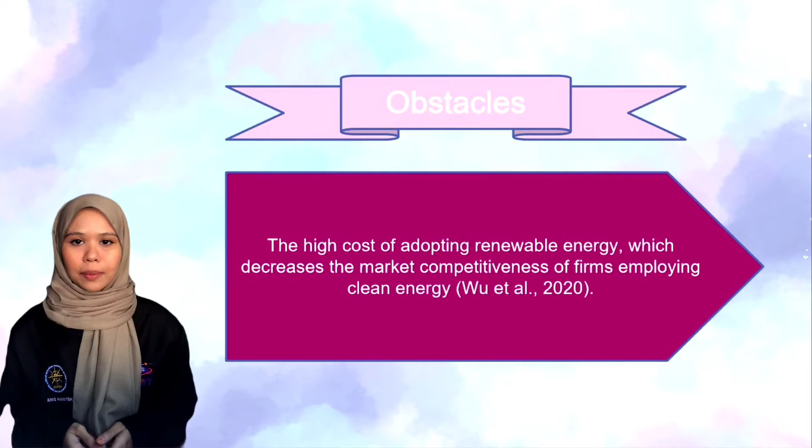Research by Ye 2017. However, there is an obstacle to reducing carbon emission, which is the high cost of adopting renewable energy, which decreases the market competitiveness of firms employing clean energy, from research by Wu 2020. Besides that, the greenhouse effect is a major component in keeping the Earth warm because it prevents part of the planet's heat from escaping into space if it were to escape through the atmosphere.

Without the greenhouse effect, the average global temperature on Earth would be substantially cooler and life as it is would be impossible. Water vapor, CO2, methane, nitrous oxide, and other gases are examples of greenhouse gases. CO2 and other greenhouse gases act like a blanket, trapping infrared radiation and preventing it from escaping into space. Thus, the obvious impact of greenhouse gas is the steady heating of the Earth's atmosphere and surface, resulting in global warming. Research by Kweku 2018.

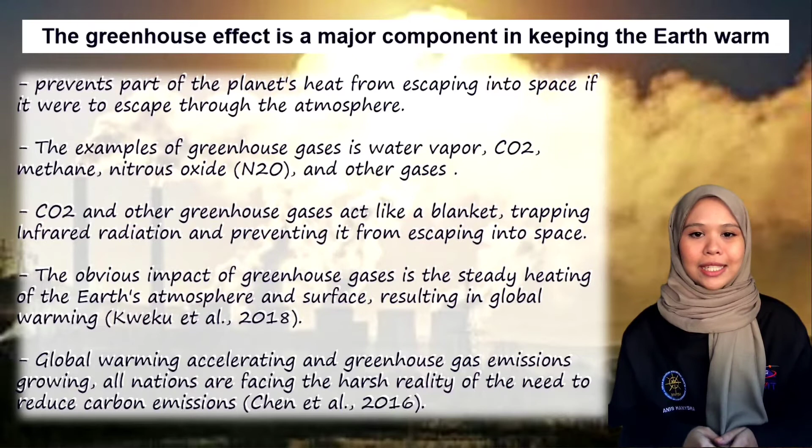Therefore, research by Chen 2016 mentioned that with global warming accelerating and greenhouse gas emissions growing, all nations are facing the harsh reality of the need to reduce carbon emissions.

Last but not least, research by Walker 2018 mentioned that maritime transport harms the marine environment, including air pollution, greenhouse gas emission, release of ballast water containing aquatic invasive species, historical use of antifoulants, oil and chemical spills, dry bulk cargo release, garbage, underwater noise pollution, ship strikes on marine megafauna, risk of ship grounding or sinking, as well as massive ship pollution of ports during transshipment or shipbreaking activities on the maritime environment.

Next, I would like to explain the results and discussion. In this chapter, the description is based on the objectives of the study. The first objective is to investigate the issues and challenges of reducing the impact of carbon on the marine environment. First of all, we all know maritime transport has an important role in international trade. According to the United Nations 2016, maritime transport has become the backbone of international trade and the global economy.

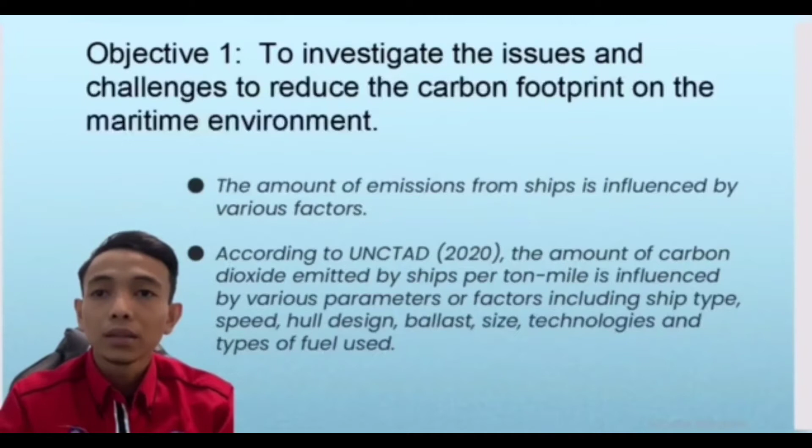However, in this development, there are also issues arising from maritime transport operations. Among them is the issue of carbon emissions released by maritime transport harming the marine environment. The amount of emission from ships is influenced by various factors. According to UNCTAD 2020, the amount of carbon dioxide emitted by ships per ton mile is influenced by various parameters or factors, including ship type, speed, hull design, ballast, size, technologies, and type of fuel used.

This figure shows annual carbon dioxide emission per vessel by vessel type in 2019. According to UNCTAD 2020, ships of larger size will naturally release more carbon dioxide per mile. However, in terms of per ton mile, larger ships will emit less carbon dioxide. This is because smaller vessels such as container ships of up to 999 TEUs emit twice as much carbon dioxide per container carried.

Container ships tend to use higher speeds in transit than dry bulk carriers. This is the reason why carbon emissions from container ships are higher than bulk carriers in terms of per vessel per year, as shown in this figure. Therefore, this leads to increased emission of carbon dioxide gas.

From that figure released by UNCTAD 2020 also, bulk carriers and container ships are the highest carbon dioxide emitting ships in 2019, at nearly 250 million tons per year. In addition, liquefied natural gas carriers and cruise ships emit higher amounts of carbon dioxide per vessel because their average size is much larger than offshore and service vessels.

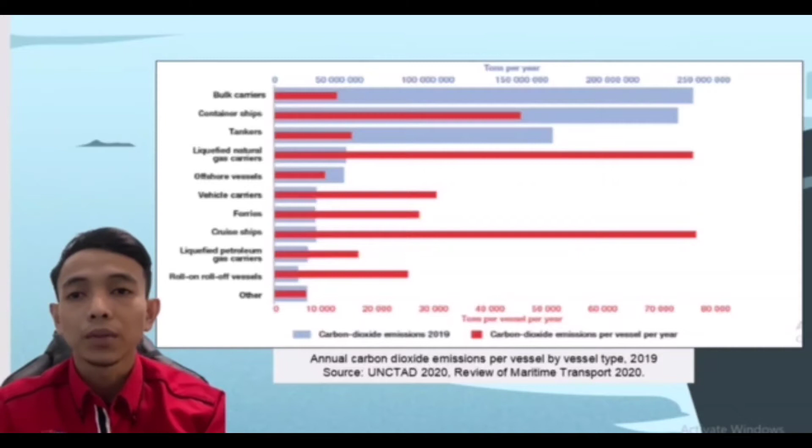For voyage-based international shipping, CO2 emissions have also increased from 701 million tonnes in 2012 to 740 million tonnes in 2018, an increase of 5.6%. Therefore, this suggests that there is an increase in the amount of greenhouse emissions into the air caused by maritime transport operations.

Next, for objective 2, there is a risk challenge from carbon emission to the marine environment, such as the climate change challenge that will affect the environment. This is evidenced by studies from Kosowska-Stamirowska 2020 mentioning that the future of the maritime transport industry is highly linked to climate change. The movement of ships contributes significantly to CO2 emissions, and future shipping routes are expected to be affected by climate change.

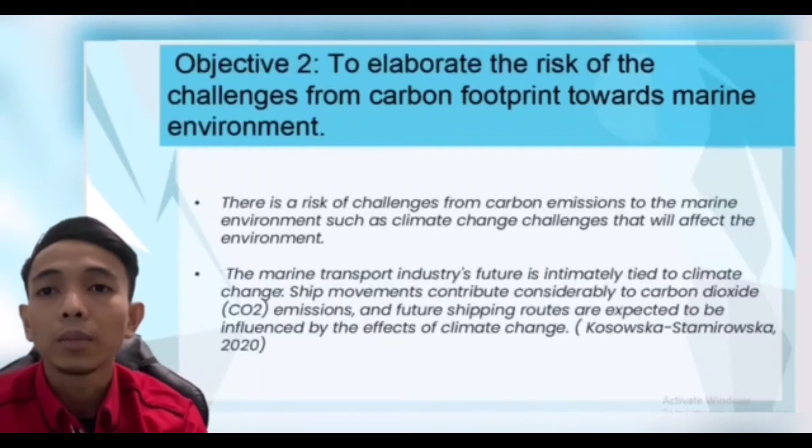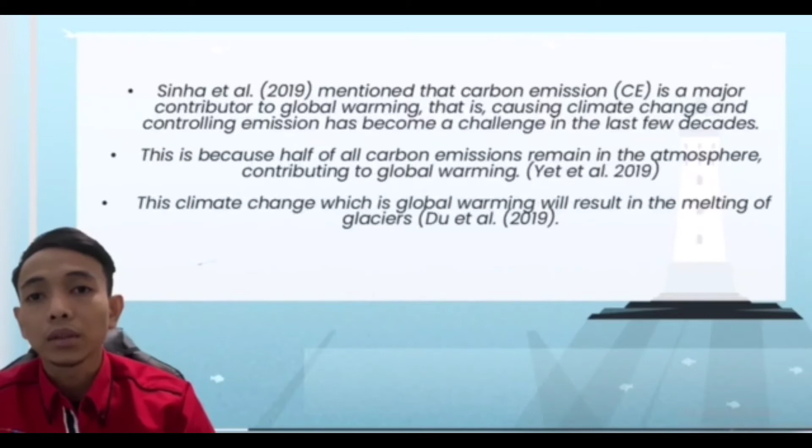Besides, Sinha et al. 2019 mentioned that carbon emission is a major contributor to global warming that is causing climate change, and controlling emissions has become a challenge in the last few decades. Research by Yet et al. 2019 stated that half of all carbon emissions remain in the atmosphere, contributing to global warming. According to Du et al. 2019, global warming has resulted in the melting of glaciers. Therefore, this poses a challenge to certain parties in reducing the carbon footprint on the marine environment, and also a challenge to the world to overcome it.

Furthermore, the risk from carbon to the marine environment causing climate change will also affect sea levels. Carbon emissions by maritime transport are also one of the contributors to sea level rise, a risk challenge that needs to be faced. Hens et al. 2018 stated that globally, climate change induced sea level rise (SLR) is on the rise. Regionally, the lowlands of China, Vietnam and Bangladesh, as well as the islands of Malaysia, Indonesia and the Philippines are among the most endangered places on earth.

Sea level rise has a significant influence on ecosystems and civilization. It endangers coastal communities, economic activity, and vulnerable ecosystems such as mangroves, coastal salt marshes, and wetlands.

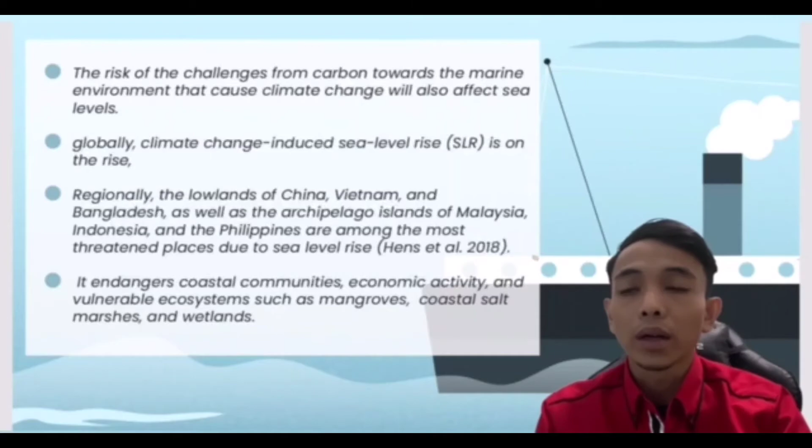Next, for objective 3, the issue of rising carbon emissions caused by growing transportation operations needs to be addressed. One method that can be implemented is law enforcement. Annex VI under MARPOL has been implemented to reduce carbon emissions by ships, limit pollutants contained in ship exhaust gas such as sulfur oxides and nitrogen oxides, and prohibit deliberate emission of ozone depleting substances (ODS). Adherence to these rules among ship owners can reduce gas emissions into the air.

Furthermore, the methods for reducing carbon emission can also be implemented in terms of the installation of exhaust gas cleaning systems on ships. According to IMO 2019, the installation of exhaust gas cleaning systems or scrubbers can eliminate air pollution. Scrubbers can reduce sulfur oxide from ship engines and boiler exhaust gas. This gives the ship the possibility to continue using heavy fuel oil. Therefore, the emission of harmful gas into the air can be reduced if all vessels are equipped with scrubbers on

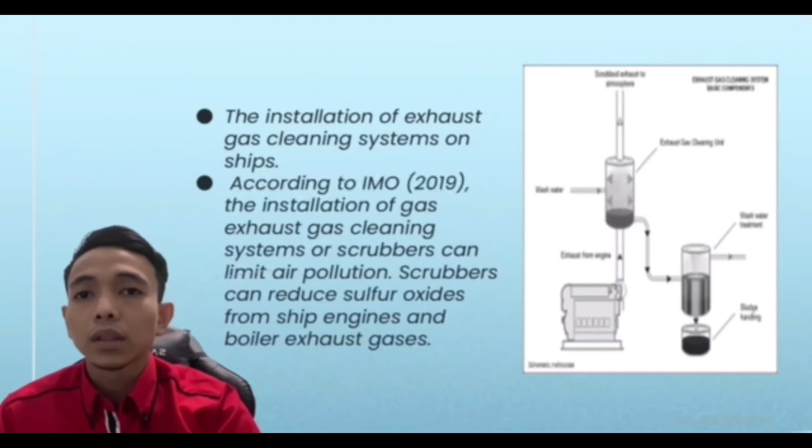the exhaust. In addition, another solution or alternative method to reduce the carbon footprint impacts toward the marine environment is energy efficient ship engine technology. According to UNCTAD 2020, the short-term measure of engine power limits proposed by Japan allows ship owners to meet the requirements related to the energy efficiency index for existing ships. Change in terms of engine power limits can reduce ship speeds by minimizing change in ship's performance. This can reduce fuel consumption as well as gas emissions.

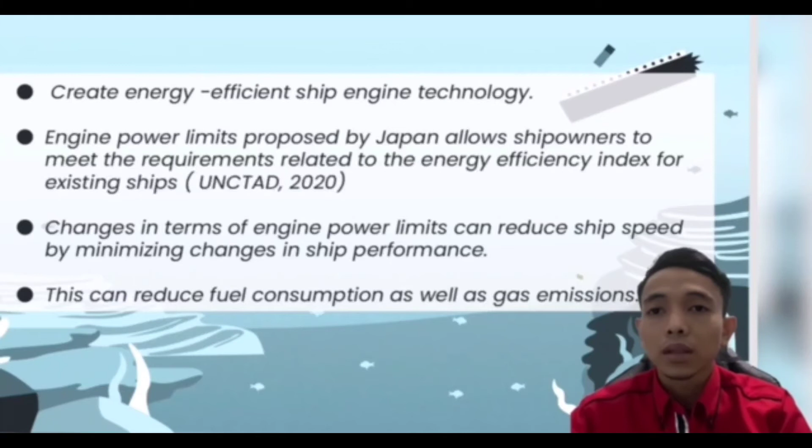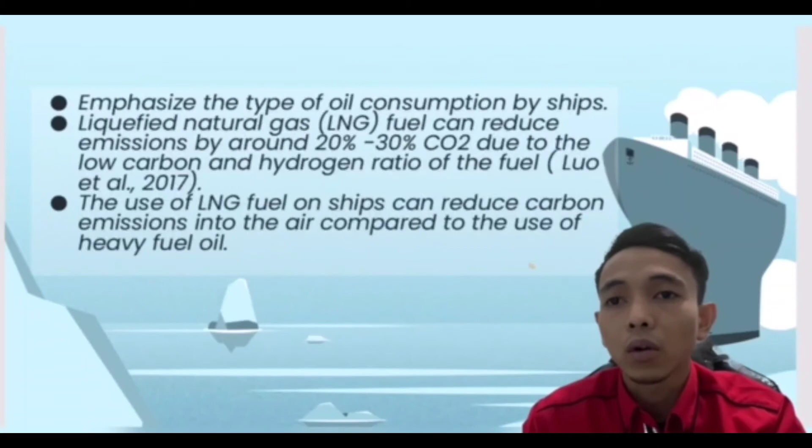Lastly, the type of oil consumption by ships needs to be emphasized. According to Luo et al. 2017, liquefied natural gas (LNG) used as ship propulsion fuel is considered clean and reliable. The use of this fuel can reduce emission by around 20% to 30% CO2 due to the low carbon and hydrogen ratio of the fuel. Therefore, the use of LNG fuel on ships can reduce carbon emission into the air compared to the use of heavy fuel oil.

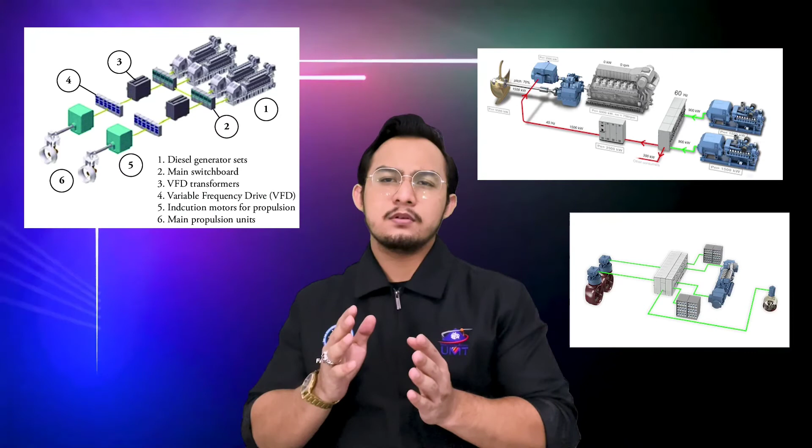Hi, I am Mohd Fakhruddin. I will explain the solution to reduce carbon footprints by maritime transport. First, using electric power and propulsion systems. The generation and propulsion of electrical energy is an essential aspect in lowering emission of carbon, particularly on ships with various operating profiles, because the higher energy efficiency and variable speeds of propulsion can lower fuel consumption considerably. Ships using efficient electric power systems require less fuel to convey the same tonnage as mechanically driven vessels, reducing greenhouse

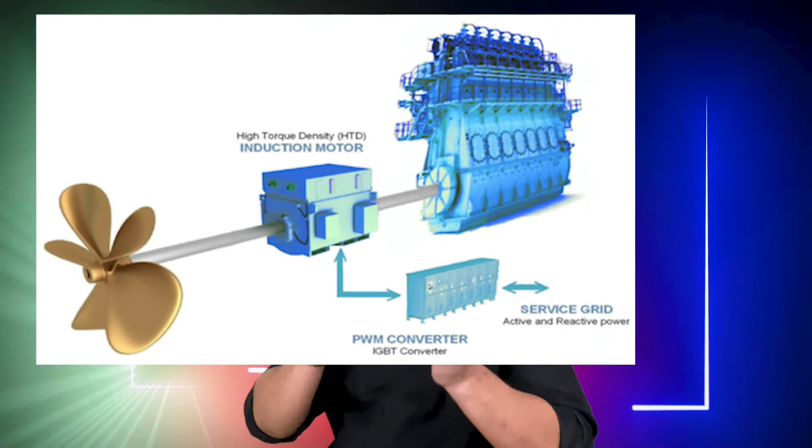gas emissions. Second, improve existing ship core systems. The new General Electric GE power conversion technology, for instance, uses predictive software to anticipate change of position and hence minimize fluctuation in the thrust of a vessel. It will improve the control strategy, the operation closed rings, energy storage, and varying frequencies. All these steps allow the operator to save up to 10% in the use of fuel, which can substantially lower the carbon footprint of a ship over time.